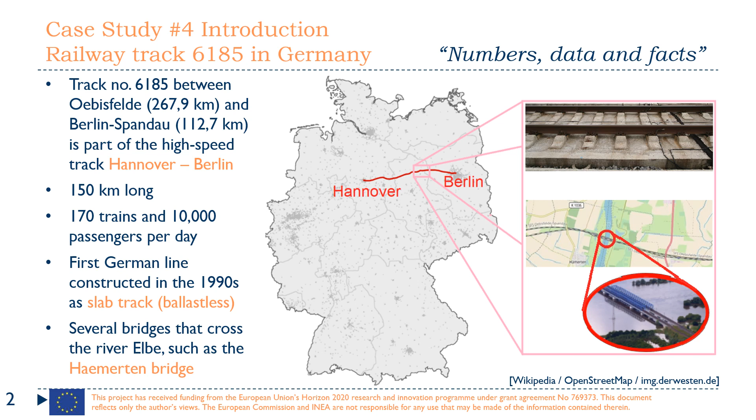Because of these many rivers and the resulting risk of flooding, we chose this specific track section as a case study for validation of the FORESEE tools. The Elbe flood in June 2013 is used here as a benchmark and practical example.

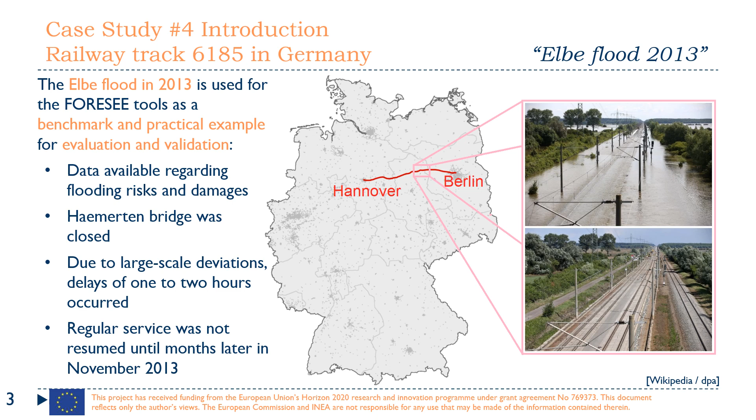In the following, we will show you how we studied this extreme example of flooding with the help of the available FORESEE tools, validated it, and worked out possible improvements to increase resilience of the railway infrastructure.

The general framework parameters for our German case study number 4 are shown as a default scenario card for better comparison with the other case studies.

We consider the operation and maintenance period from the perspective of a railway infrastructure manager regarding the life cycle. In our case, the central hazard risk potential is flooding during heavy rainfalls combined with rising rivers. Our case area is the railway transfer track 6185, which runs only on a national scale in Germany.

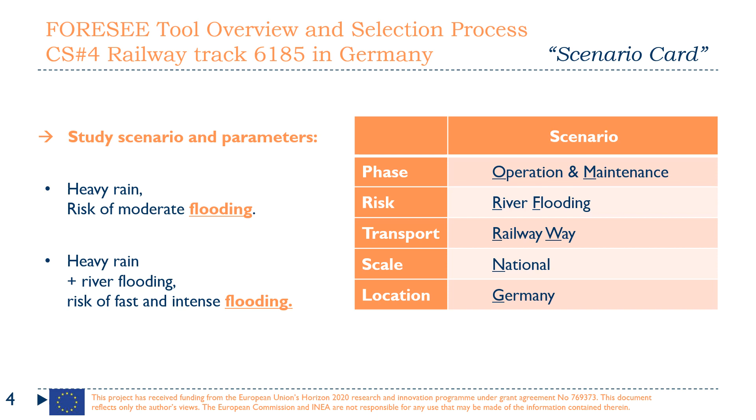For our tool selection, we used the guidelines to measure the level of service, resilience indicators and targets. As a result, the following 3 key indicators have the greatest potential for resilience improvements in our case study: the presence of a maintenance strategy, the extent of interventions executed prior to the event, and review and update of the emergency plan.

To increase these 3 key indicators, we selected the following 6 FORESEE tools: bridge flooding model for flooding assessment, risk mapping, the command and control center, and 3 more tools for plan review.

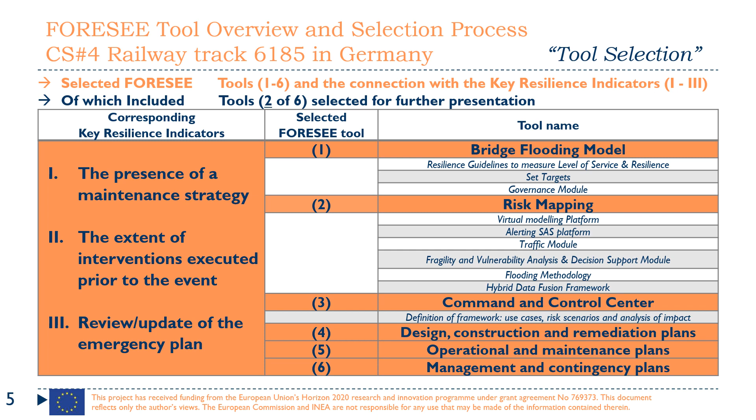In overview, we proceed as follows for validation in case study 4. First, the guidelines to measure the level of service, resilience indicators and targets have been adapted by the infrastructure manager, including real data.

Then the 6 FORESEE tools were selected to increase the resilience indicators. These can be divided thematically into the phases before an event, during an event, and after an event.

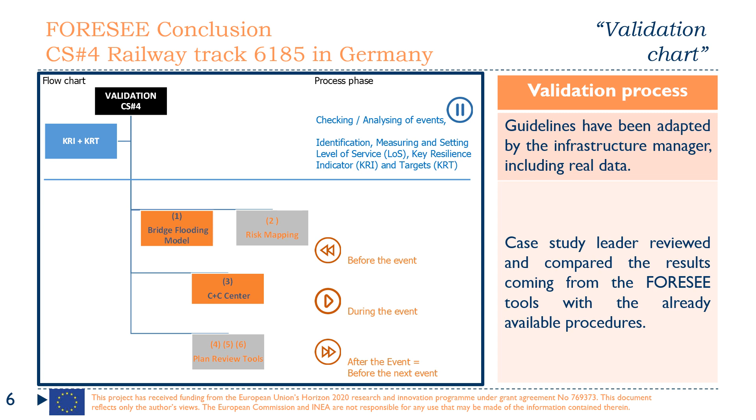In our case study, we reviewed and compared the results coming from the tool with the already available processes based on practical examples. The results and outcomes of the validation phase in case study 4 are described in the following using the bridge flooding model and the command and control center as an example.

On the left side, you can see a result of the bridge flooding model. The flood event of the River Elbe in June 2013 was taken as input data for the Haemerten Bridge. As a result, this FORESEE tool can provide a water level dependent usability assessment and therefore increase resilience through prevention.

On the right side, you can see the validation outcomes of the command and control center. In this case, a dam failure near Haemerten caused by the Elbe flood in June 2013 was chosen as the validation event. This FORESEE tool can generate automatic alerts in real time through anomaly detection already during the hazard event.

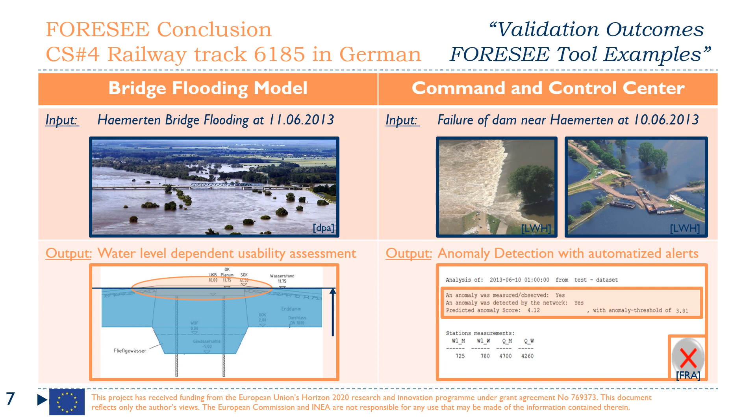If we now monetize the resilience indicators and targets as a level of service, the comparison shows that the net benefit costs, and therefore also resilience of the infrastructure in case study 4, can increase clearly.

For clarification, the left-hand table first shows the level of service for case study 4. This is used to measure the actual and target value of the 3 identified key resilience indicators.

If you expect that the key resilience targets can be achieved in case study number 4 through the use of the 6 selected FORESEE tools, the improvement in net benefit costs is shown in the right-hand side diagram.

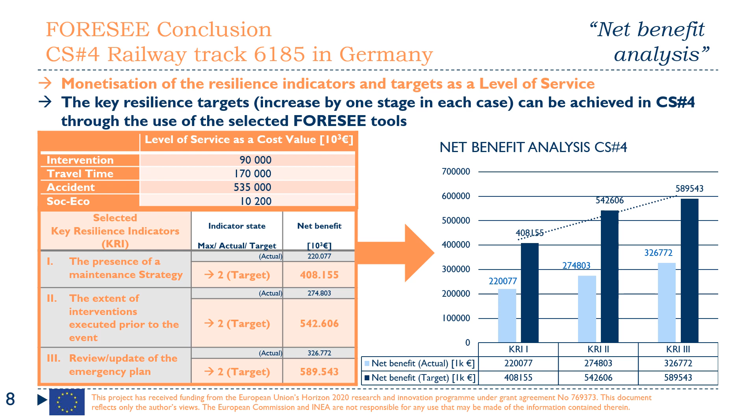The key resilience indicators and targets guidelines, first of all, offer a possibility for resilience definition, measurement, and improvement options. The bridge flooding model and risk mapping provide model-based risk assessments.

The command and control center serves as an automated decision support and warning system. And last but not least, the tools and methods for the plan review can help in the analysis, evaluation, improvement, and design of construction, operation, and emergency plans.